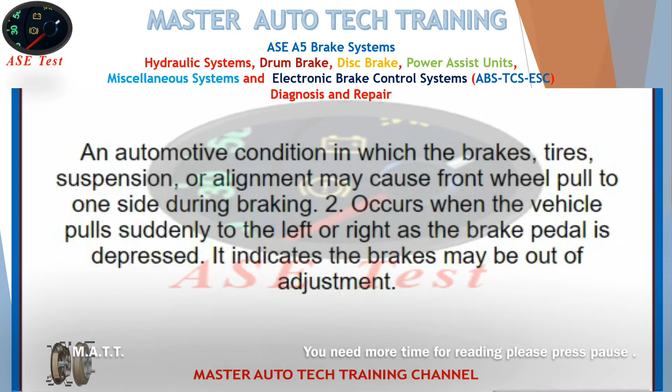Master cylinder: the part of the hydraulic brake system in which system pressure is generated.

Two technicians are explaining how to service an aluminum metal matrix composite alloy rotor when resurfacing is not used. Technician A says servicing these rotors is slightly different from cast iron rotors. Technician B says you must remove the dark transfer layer on the rubbing surface anytime the rotor is removed. Who is right?

B only. Technician A is right because these rotors are serviced slightly different from cast iron rotors. Technician B is wrong because the dark transfer layer on the rubbing surface does not harm rotor performance and should not be removed unless the rotor needs to be machined due to being warped.

Grooving, also referred to as scoring: deep cuts in the rotor surface as a result of worn linings, foreign object damage, or sand.

Self-adjusters: used as drum brakes expand as the brake shoes wear, so the gap between the shoes and the drum remains roughly constant throughout the life of the shoes. Teeth on the gear of the self-adjusters engage with a metal tab when you apply the brakes. As the brakes wear, the metal tab turns the gear and causes the self-adjusters to unscrew and expand.

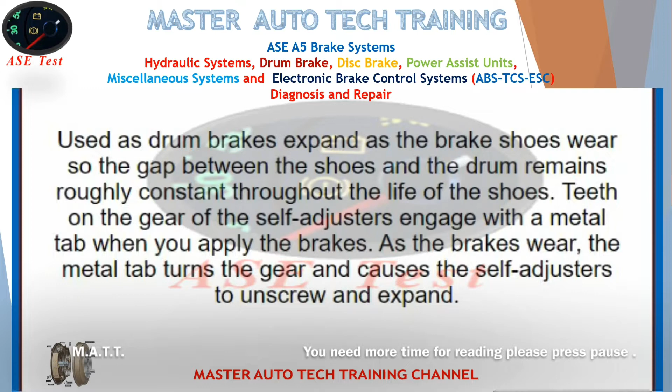Technician A says silicon-based brake fluid may be used in an ABS anti-lock brake system. Technician B says when an ABS wheel speed sensor fails, you must replace both wheel sensors on that axle. Who is right?

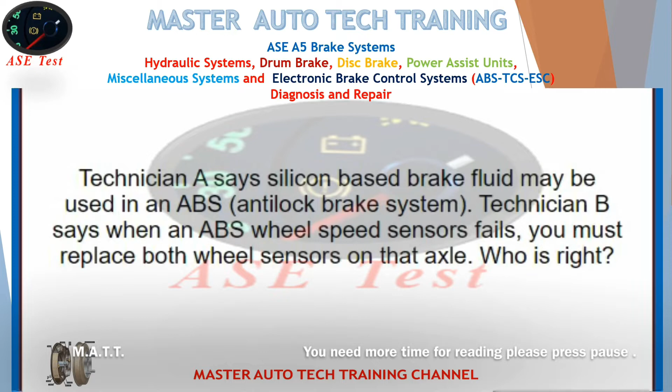Neither A nor B. Technician A is wrong because silicon fluid, or DOT5, is not compatible with DOT3 or DOT4 and is primarily used in military and special applications because it has no affinity for water. Technician B is wrong because wheel sensors are not matched.

A is wrong because manual bleeding requires another technician to operate the brake pedal while the main tech opens and closes the bleeder screws to allow air out of the hydraulic system. However, you must stop to add fluid to the master cylinder, whereas you do not with a pressure bleeder. B and D are wrong because you must also stop to add fluid to the master cylinder.

Front: duo-servo brake. Back: a drum brake design where the primary, forward-facing brake shoe exerts force against the secondary, rearward-facing brake shoe during braking while the vehicle is traveling forward.

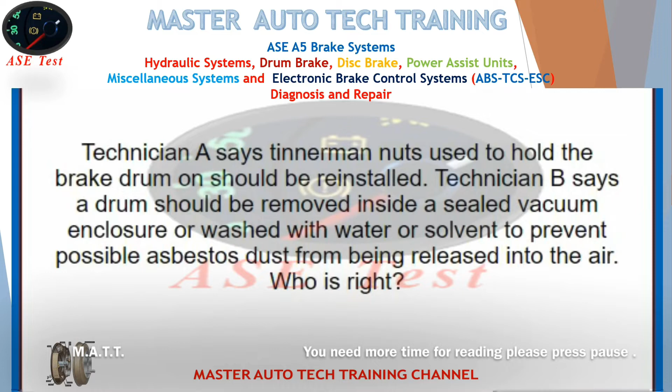Front: Technician A says Tinnerman nuts used to hold the brake drum on should be reinstalled. Technician B says a drum should be removed inside a sealed vacuum enclosure or washed with water or solvent to prevent possible asbestos dust from being released into the air. Who is right?

Back: B only. This is a mandated practice to prevent exposure to asbestos. Technician A is wrong because new vehicles have Tinnerman nuts, also called speed nuts, on the studs when the vehicle is being assembled. These thin sheet metal nuts keep the brake drum from falling off during shipping and handling prior to installation of the rear wheels. The Tinnerman nuts can be discarded because they are not needed after the vehicle leaves the assembly plant.

Front: the front brake rotors and pads are being replaced on a vehicle equipped with a TCS traction control system and electronic stability control system (ESC). Technician A says the yaw rate and deceleration sensor should be recalibrated. Technician B says the new rotors should be indexed to the hub using a dial indicator for the least amount of runout. Who is right?

Back: B only. This is the standard process by many OEMs when a new rotor is installed. Technician A is wrong because recalibration is not required for these sensors.

Front: on a car with single-piston floating caliper disc brakes, the disc brake pad between the caliper piston and the rotor is badly worn. The other brake pad is slightly worn. Technician A says excessive rotor runout could be the cause. Technician B says insufficient clearance between the pads and caliper slider could be the cause. Who is right?

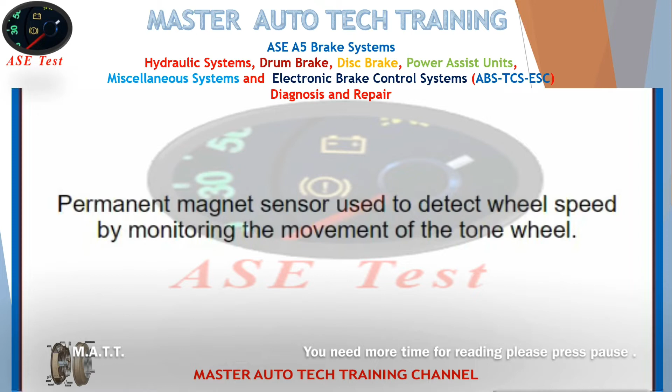Front: Technician A says some noise and brake pedal pulsation is normal when the ABS anti-lock brake system actuator is operating. Technician B says the ABS anti-lock brake system warning light should come on and remain on for approximately 3 seconds after the key is turned to the on position. Who is right?

Back: both A and B. Both technicians are correct. Tech A is right because noise and brake pedal pulsation are a normal part of ABS operation. Tech B is right because the ABS warning light should come on and remain on for approximately 3 seconds after the key is turned to the on position.

Front: brake shoe adjusters. Back: device that maintains the correct drum to lining clearance as the brake linings wear.

Front: bleeder wrench. Back: a wrench used in the bleeding of the hydraulic brake system.

Front: the master cylinder fluid level is low on a vehicle. Technician A says the cause could be a brake adjustment issue. Technician B says that one of the brake systems has failed. Who is right?

Back: both A and B. Both technicians are correct. Tech A is right because if the brakes are adjusted to allow too much clearance between the lining and the drum, the brake shoes will have to travel further to contact the brake drum, resulting in more fluid going to the wheel cylinder to compensate for the travel distance. Tech B is right because when one brake system fails, the other system provides fluid for the remaining brakes, resulting in a lower fluid level in that chamber with no fluid in the failed chamber.

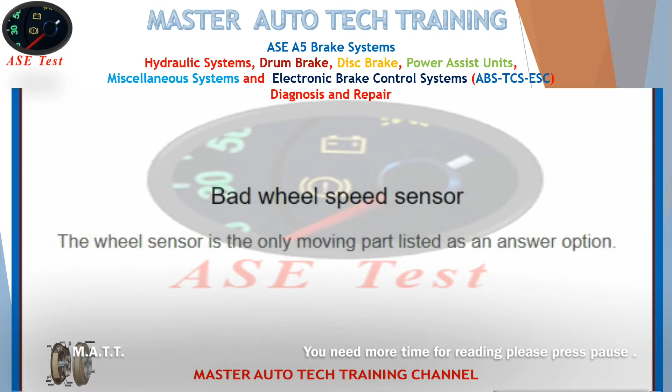Two technicians are describing master cylinder characteristics. Technician A says it is not normal to see fluid movement in the reservoir when the brake pedal is depressed. Technician B says a defective master cylinder can cause the brake pedal to slowly sink to the floor when depressed. Who is right?

B only. A defective master cylinder can cause the brake pedal to slowly sink to the floor when depressed. If fluid is leaking internally past the seals, Technician A is wrong because it is normal to see fluid movement in the reservoir when the brake pedal is depressed.

Accumulator: a gas-charged cylinder or chamber used to store brake fluid, used in anti-lock and hydro-boost brake systems.

Brake light switch: a switch used to operate the brake lights, installed on the brake pedal linkage.

The primary brake circuit fails due to an external leak at the rear section of a dual master cylinder. Technician A says you will notice a spongy, lower than normal brake pedal and reduced braking power. Technician B says the brake pedal will grab higher than normal. Who is right?

A only. Brake fluid leaks cause air in the system, which lowers the brake pedal, making it spongy with reduced braking power. Technician B is wrong because air in the system will not cause any early brake engagement or grabbing higher than normal.

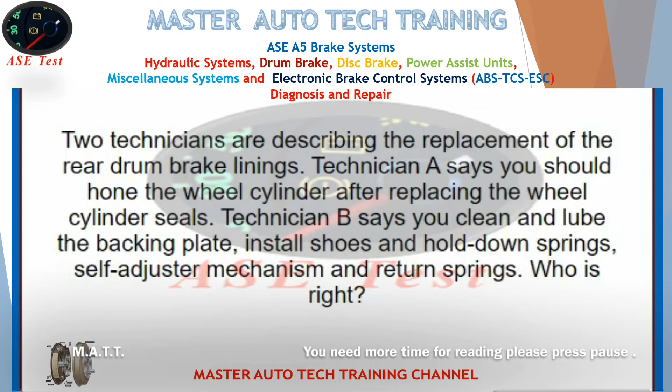Two technicians are describing the replacement of the rear drum brake linings. Technician A says you should hone the wheel cylinder after replacing the wheel cylinder seals. Technician B says you clean and lube the backing plate, install shoes and hold down springs, self-adjuster mechanism and return springs. Who is right?

B only. Only Technician B is correct. It is the standard procedure used for lining replacement. Technician A is wrong because many wheel cylinders now use a burnished surface which would be removed if honed.

Refinishing: it is not always necessary to refinish brake rotors when doing routine brake maintenance such as replacing brake shoe and lining assemblies. Refinish rotors only under the following circumstances: there is brake pedal pulsation, or there are heat spots, cracks, or excessive scoring.

Pulling brakes: an automotive condition in which the brakes cause the vehicle to veer to the right or left when the brakes are applied.

Pressure bleeding: the use of a pressure brake bleeder which allows for brake bleeding to be performed efficiently by a single technician.

Turning: also referred to as cutting or machining. The removal of a layer of metal from a rotor or drum to restore the surface finish.

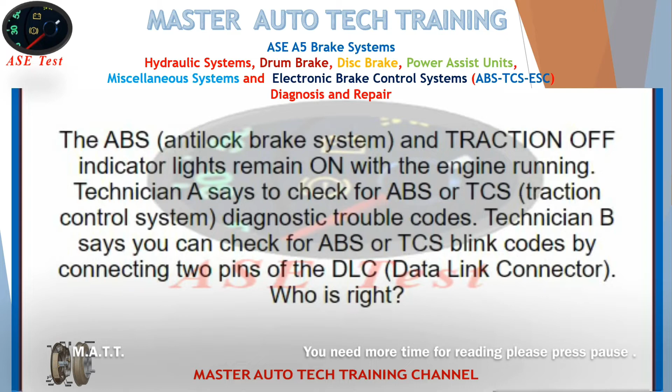The ABS anti-lock brake system and traction off indicator lights remain on with the engine running. Technician A says to check for ABS or TCS traction control system diagnostic trouble codes. Technician B says you can check for ABS or TCS blink codes by connecting 2 pins of the DLC data link connector. Who is right? Both A and B. Tech A is right because you check for ABS or TCS diagnostic trouble codes when the amber ABS warning lamp or traction off light is on. Tech B is right because on older ABS systems you can check for ABS blink codes by connecting 2 pins of the DLC data link connector.

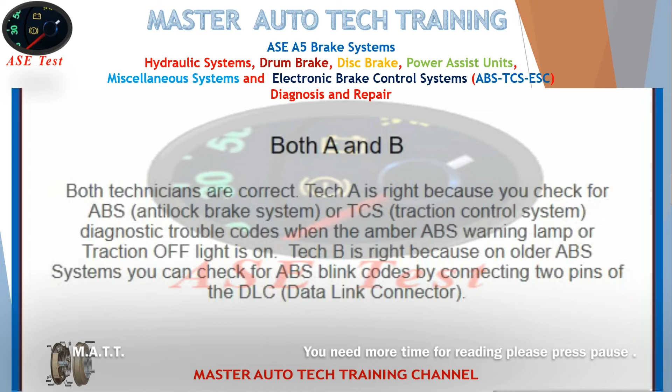What is the purpose of the colored stripe on the brake hose outer casing? To keep from twisting the hose. The colored stripe is there to help keep the hose straight, as it should not be twisted.

Residual pressure valves. Valves that maintain residual fluid pressure of approximately 10 psi, 69 kilopascals, to help keep contaminants out of the system. One valve is located in each outlet to the brake lines.

Proportioning valve. A valve designed to equalize braking action on vehicles with front disc and rear drum brakes.

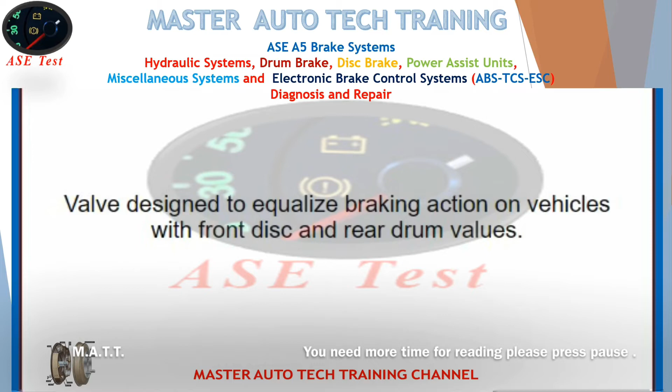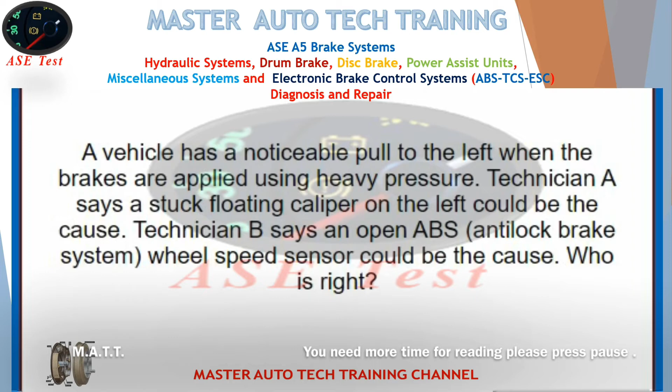A vehicle has a noticeable pull to the left when the brakes are applied using heavy pressure. Technician A says a stuck floating caliper on the left could be the cause. Technician B says an open ABS wheel speed sensor could be the cause. Who is right? Neither A nor B. Technician A is wrong because a stuck right caliper will cause a pull to the left. Technician B is wrong because defective wheel sensors do not cause brake pulls.

Bench bleeding. A brake bleeding process that removes air from inside the master cylinder.

Pressure differential valve. A valve used in a dual brake system to turn on a dash warning light if the pressure drops in either part of the system.

Technician A says a steel piston should be cleaned with sandpaper to remove rust. Technician B says brake assembly fluid or clean brake fluid should be used to lubricate the caliper pistons before installing in the caliper. Who is right? B only. Brake assembly fluid or clean brake fluid is the best fluid to use when assembling a caliper. Technician A is wrong because care should be taken when cleaning steel pistons. Use crocus cloth to remove any surface staining. Do not use sandpaper, emery cloth, or any other substance that may remove or damage the chrome surface finish.

Backing plate. A metal plate that holds the wheel cylinder, shoes, and other parts inside a drum brake.

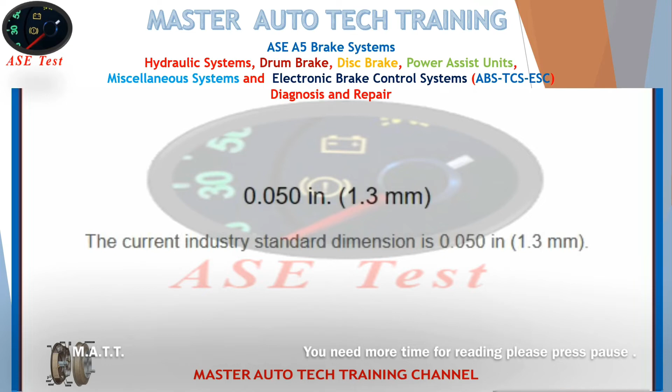The disc brake linings should be at what measurement above the pad backing plate or rivet heads? 0.050 in, 1.3 millimeters. The current industry standard dimension is 0.050 in, 1.3 millimeters.

Anti-lock brake system, ABS. A computer-controlled system that is part of the base brake system. The system cycles the brakes on and off to prevent wheel lock-up and skidding.

Oversize drums. Any used brake drum will show some wear. When manufactured, brake drums are made thick enough to allow for a certain amount of wear in machining. Most brake drums are allowed to be oversized 0.060 in, 1.5 millimeters. The oversize limit is usually stamped on the face of the brake drum or in the vehicle service manual.

Electronic wear indicator. Pad wear indicators have evolved from the standard metal clip or audible sensor to the electronic wear sensor. They both perform the same basic function of warning the driver when the brake pads have worn down enough to require replacement, by providing a light for the driver as well.

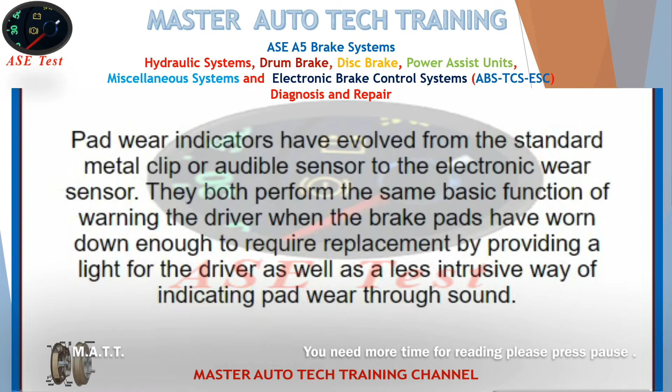Pad wear indicator. Pad wear indicator.

The front rotor thickness variation, parallelism, is being measured. Technician A says you use a feeler gauge to make the measurement. Technician B says a dial indicator is used to make the measurement. Who is right? Neither A nor B. Both technicians are wrong. A special micrometer or digital readout rotor micrometer is used, which is an accurate tool when measuring a rotor. Both fractional inches and metric millimeters are generally available.

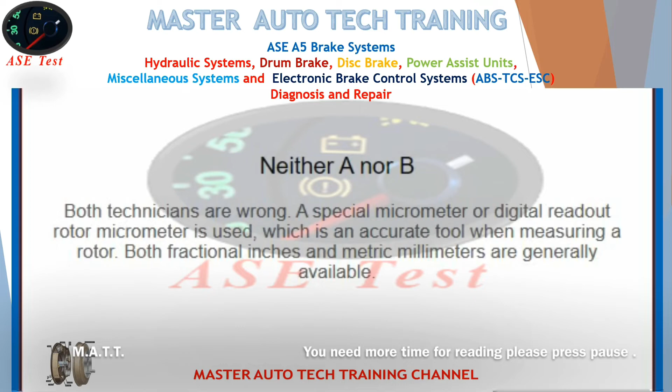ABS control module. A computer that controls the operation of a system, based on sensor inputs, usually less complex than the computer that controls the engine and other vehicle systems.

A vehicle with disc drum brakes requires excessive brake pedal effort to stop. The brake pedal is firm when applied. While starting the engine with the brakes applied, the pedal does not go down slightly. Technician A says excessive brake pedal free play could be the cause. Technician B says air trapped in the hydraulic system could be the cause. Who is right? Neither A nor B. Both technicians are wrong because the problem is in the power booster. Excessive free play delays application and air in the hydraulic system will cause a spongy pedal.

Technician A says the threads and end caps of the adjusters should be lubricated with lithium grease before being installed. Technician B says star wheel adjusters use the same threads for the left and right sides of the vehicle. Who is right? A only. Technician A is right because the adjusters should be lubricated with synthetic brake grease, lithium brake grease, or anti-seize compound before being installed. Technician B is wrong because star wheel adjusters use different threads, left and right-handed, for the left and right sides of the vehicle.

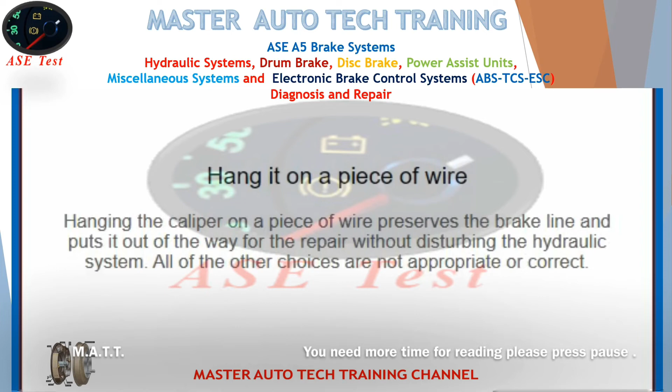Back: Hang it on a piece of wire. Hanging the caliper on a piece of wire preserves the brake line and puts it out of the way for the repair without disturbing the hydraulic system. All of the other choices are not appropriate or correct.

Front: Pedal action test. Back: A diagnostic test to determine changes in brake pedal action or feel.

Front: The rear wheels lock up during hard braking. Technician A says a defective pressure differential valve could be the cause. Technician B says a defective proportioning valve could be the cause. Who is right? Back: B only.

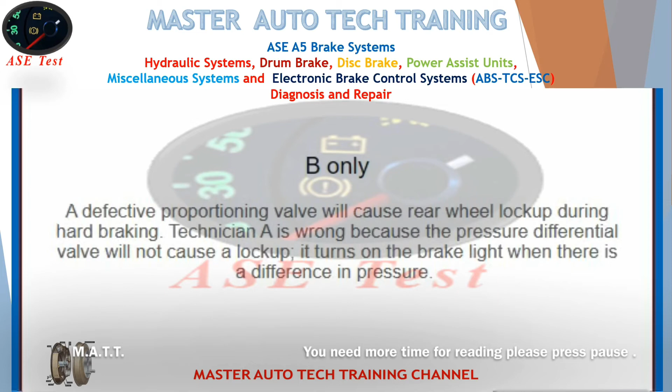A defective proportioning valve will cause rear wheel lockup during hard braking. Technician A is wrong because the pressure differential valve will not cause a lockup, it turns on the brake light when there is a difference in pressure.

Front: Pushrod height. Back: The distance a pushrod extends beyond the booster housing.

Front: Pushrod height gauge. Back: A gauge that measures how far the pushrod sticks out of the brake booster.

Front: Hold down spring. Back: A spring tension mechanism that holds a brake shoe against a backing plate.

Front: Brake warning light switch. Back: Dashboard indicator that warns of low brake system hydraulic pressure.

Front: The brake drum discard diameter is. Back: Stamped or cast into the drum. When manufactured, brake drums are made thick enough to allow for a certain amount of wear and machining. However, there is a limit to how much metal can be worn or machined off a drum.

Most brake drums are allowed to be oversize by 0.060 inches or 1 mm, however this limit may vary. The oversize limit is usually stamped on the face of the brake drum or in the vehicle service manual. To determine the drum size, use a brake drum micrometer. The drum size must never exceed the specified limit. Doing so could lead to a catastrophic failure.

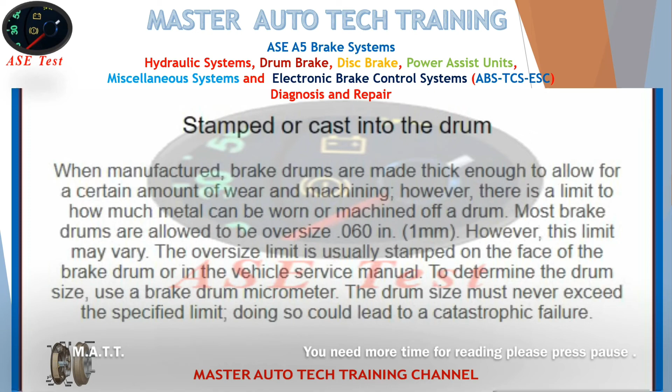Front: A vehicle with four-wheel disc brakes has a brake squeal. Technician A says a defective proportioning valve could be the cause. Technician B says disc brake squeal is often caused by movement of the disc brake pad during braking. Who is right?

Back: B only. Disc brake squeal is often caused by movement of the disc brake pad during braking. To reduce disc brake squeal, all mating surfaces of the brake should be clean and lubricated. Always use OEM recommended clips and anti-squeal shims. To further reduce noise, do not machine a disc brake rotor more than absolutely necessary.

Technician A is wrong because the proportioning valve only affects brake lockup and is not used on four-wheel disc brakes, only on disc drum combinations.

Front: Two technicians are discussing the machining of a brake rotor. Technician A says OEMs like GM and others prefer the off-car form of rotor machining. Technician B says to check that the rotor is mounted correctly, loosen the retaining nut, turn the rotor 1/2 turn (180 degrees), retighten the nut and make another scratch cut. Who is right?

Back: B only. Technician B is correct because this is the correct process for on or off-car machining. Technician A is wrong because OEMs prefer the on-car form of rotor machining.

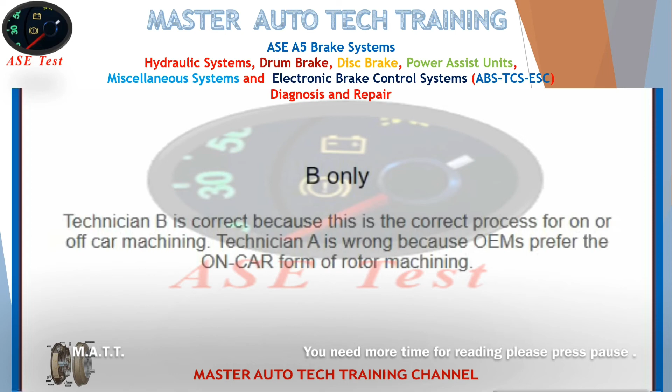Front: What type of material is used to repair brake lines? Back: Double-walled steel tubing. Only double-walled steel tubing can be used for brake line repair. All others are unacceptable.

Front: Anti-rattle clips. Back: One or more metal components designed to keep brake pads from vibrating and rattling.

Front: The brakes are being bled on an older vehicle equipped with a quick take-up valve in the master cylinder. Technician A says the quick take-up valve must be depressed during brake bleeding. Technician B says the brakes on this vehicle cannot be bled. Who is right?

Back: Neither A nor B. Both technicians are wrong. The brakes on quick take-up systems use the same bleeding procedure as those without this valve. There are no differences.

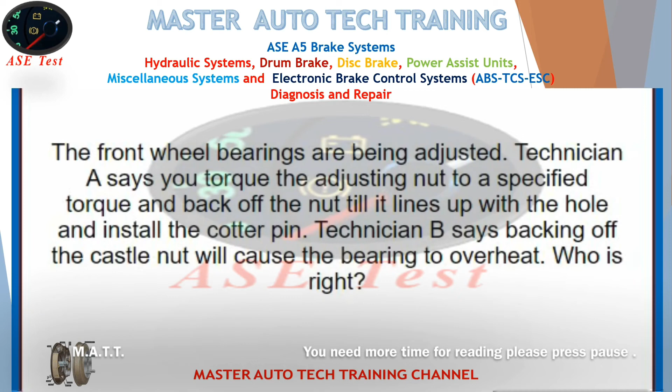Front: The front wheel bearings are being adjusted. Technician A says you torque the adjusting nut to a specified torque and back off the nut till it lines up with the hole and install the cotter pin. Technician B says backing off the castle nut will cause the bearing to overheat. Who is right?

A only. You torque an adjusting nut to a specified torque and back off the nut till it lines up with the hole and install the cotter pin. Technician B is wrong because backing off the castle nut will not cause the bearing to overheat.

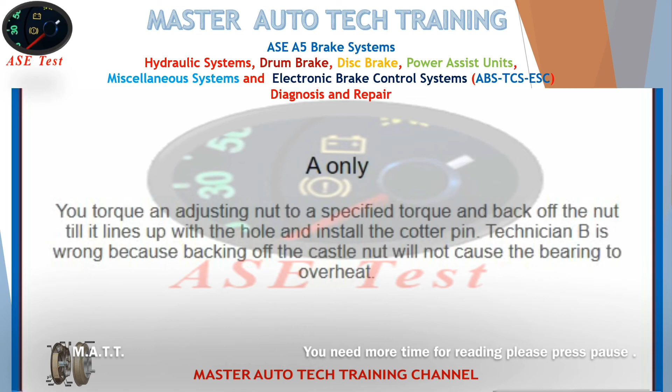Brake lathe: a device used to remove the glazed and scored outer layer from rotors and drums.

A master cylinder has been replaced. In an overall bleeding sequence, which part should be bled first? Master cylinder. The master cylinder is always bled first and then the wheels in order from the one farthest from the master cylinder.

Accumulator pressure retention test: a diagnostic test conducted to determine if the accumulator is defective.

With the brakes applied on a vehicle with power brakes, the pedal moves down slightly when the engine is started. Technician A says the cause could be a leaking power brake booster diaphragm. Technician B says the cause could be a stuck closed residual check valve in the hose from the intake manifold to the power brake booster. Who is right? Neither A nor B. Both technicians are wrong because this is how power brakes are supposed to operate.

Technician A says brake hoses should rarely go bad and do not require frequent inspection. Technician B says hose swelling is normal and does not require service. Who is right? Neither A nor B. Both technicians are wrong. Brake hoses do fail after time and hose swelling is not normal and does require service.

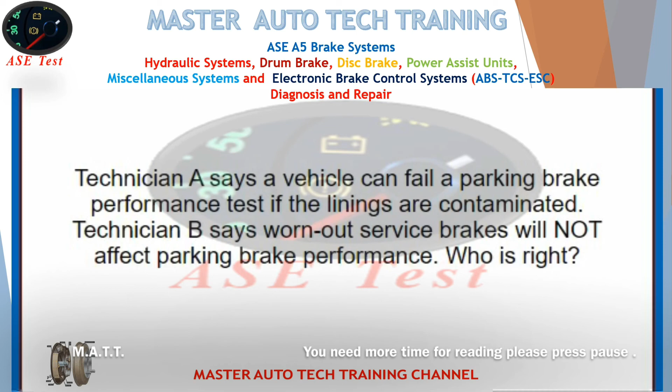Technician A says a vehicle can fail a parking brake performance test if the linings are contaminated. Technician B says worn-out service brakes will not affect parking brake performance. Who is right? A only. Technician A is correct because contaminated lining will drastically reduce stopping distance and gripping power. Technician B is wrong because vehicles with rear drum brakes use the rear brakes as the parking brake, therefore worn-out brakes will affect parking brake operation.

Wear indicator: a small piece of flat spring steel attached to one of the brake pads. As the pad linings wear down, the end of the spring contacts the spinning rotor, notifying the driver of the need for brake service.

Grabbing brakes: an automotive condition in which the brakes apply too quickly, even with light brake pedal application, making it difficult to stop slowly.

Bell mouth drum: occurs when the open end of the brake drum distorts outward due to high braking temperatures and excessive braking pressures. A bell mouth drum is indicated when the brake shoes are worn at an angle with the low point on the outer edge and the high point at the inner edge. The condition can be verified by measuring the drum at different points. When a drum has a larger diameter at the open end than at the flange, it is considered bell-mouthed and it prevents full contact with the lining.

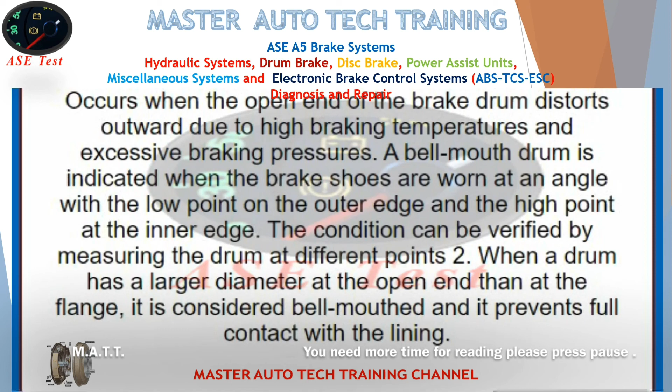Brake pedal reserve: the distance measured from the vehicle's floor to the brake pedal when the brakes are applied.

Dual servo brake: a drum brake designed where the primary, forward-facing brake shoe exerts force against the secondary, rearward-facing brake shoe during braking while the vehicle is traveling forward.

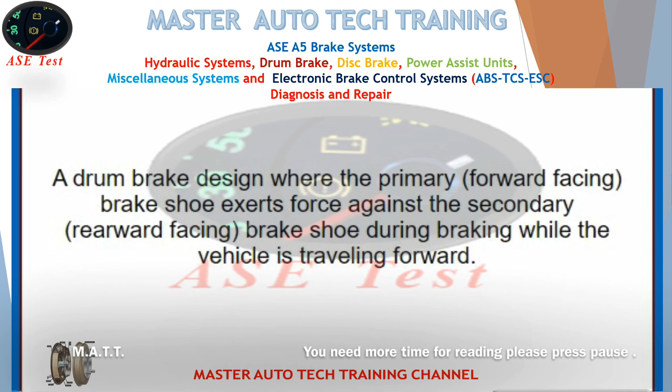A truck with a hydraulic brake booster has a spongy brake pedal feel. Technician A says there may be air in the master cylinder. Technician B says the power steering belt may be slipping. Who is right? A only. Air will always create a spongy pedal. Technician B is wrong because a slipping power steering belt will affect boost with no effect on a spongy pedal. The pedal would be hard.

Two technicians are discussing how to remove a caliper piston. Technician A says to use compressed air. Technician B says to use a large C-clamp. Who is right? A only. Use extreme care when removing a caliper piston using compressed air, as the pressure applied can force the piston out of the caliper with tremendous force.

Technician A says a pulsation felt in the brake pedal during an ABS anti-lock brake system stop indicates there is a problem within the ABS system. Technician B says the ABS amber light comes on whenever there is wheel slippage. Who is right? Neither A nor B. Technician A is wrong because the pulsation is normal and not a problem. Technician B is wrong because the amber light does not come on unless there is a fault in the ABS system.